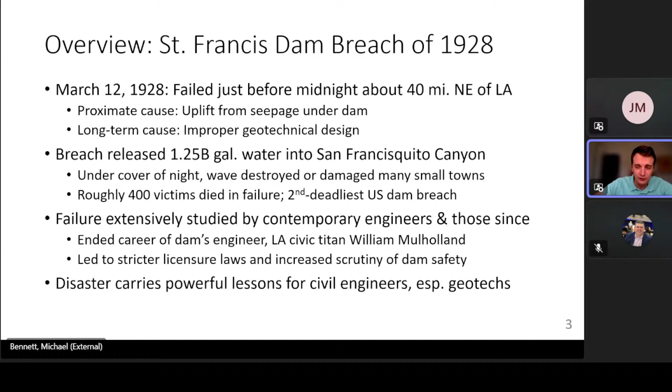So, Los Angeles in 1885 was just a small coastal town with a population of 11,000. San Francisco was the dominant metropolis in the Golden State. But that all began to change as the Gilded Age turned over to the Progressive era. In 20 years, by 1905, the city's population had swelled nearly 1,800% to more than 200,000 people. And therein lay a problem, because, as has been said elsewhere, nature has not provided California with the right amount of water in the right places at the right times.

And the solution to that was the Los Angeles Aqueduct. It is a 233-mile network of channels and siphons that conveys water from the Owens River in central California down to the City of Angels. It opened in 1913 and supplied Los Angeles with 300,000 acre-feet annually. And the project was brought to fruition by the city's water supply engineer, a political and technical wizard, or at least that was his reputation then, William Mulholland.

So William Mulholland was self-taught, as many engineers at the time were. He had worked for the city since the 1870s and had slowly climbed the ladder rung by rung from a ditch digger on sewer projects to chief of the Bureau of Waterworks and Supply. He was known to his men with some affection and a good deal of deference as the chief, and Mulholland tended to keep his own counsel. He didn't take kindly to others meddling, as he saw it, in his business.

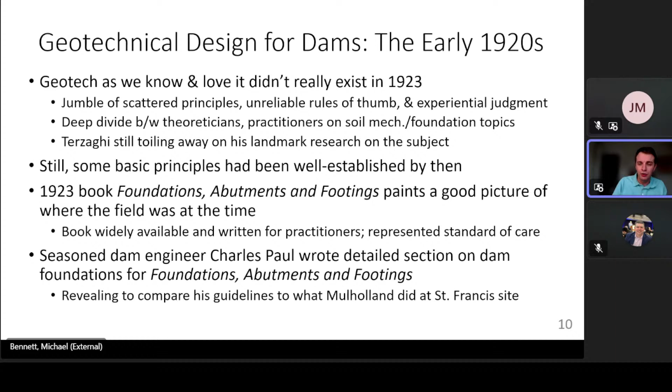Now, this book contained a detailed section on dam foundations, authored by seasoned dam engineer Charles Paul. And so I think it's quite revealing to compare the guidance Paul gave in his chapter of the book to what William Mulholland did at the St. Francis Dam site. Paul said that the main requirements to be considered for a dam foundation included bearing power, water tightness or control of seepage, and prevention or control of upward pressure uplift. And the failure to understand those conditions or appreciate their importance, he added gravely, has often resulted in disaster.

He noted that any masonry or concrete dam more than 200 feet tall needed to be founded on firm, hard rock without open seams, fissures, or faulting. The St. Francis Dam was ultimately going to be 205 feet tall, and the friable sandstone and fissile mica schist below it weren't really ideal for what Mulholland wanted to build there.

But Charles Paul recognized that you couldn't pick subsurface conditions at a site. Not every site was going to be ideally constituted for the dam you wanted to build there. And so he noted that a subsurface examination was ever more critical as the material strength went down. He also noted that special treatment would often be necessary so that the dam's foundation requirements were attained.

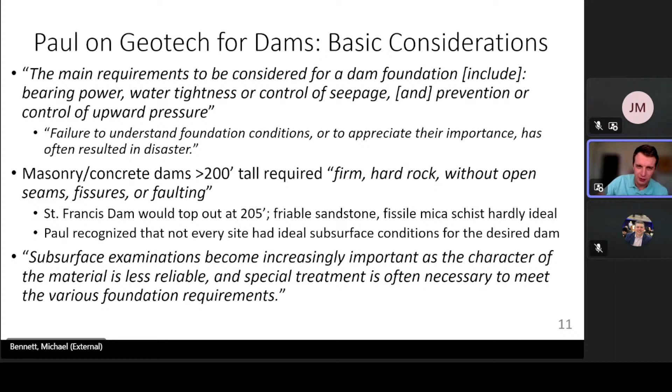Paul noted that it was desirable for dams to have a careful geological examination of foundation conditions, ideally one by an expert practical geologist. Per his account, it was important to assess the bedrock's probability of fissures and faulting, as well as former upheavals and disturbance, such as paleo landslides.

Paul recommended gathering soil samples at dam sites using wash borings. A common technique in 1923, put your wash hose in the ground after you drill a boring, and you wash samples to the surface. He added that those were most valuable if they were used together with test pits, which he wrote afforded the only opportunity to inspect material in place. That's still a huge advantage of them to this day.

As for bedrock cores, Paul preferred that at least 20 feet of bedrock be cored to assess its character. You had to verify that it was there. You had to observe its quality, whether there were faults, geologic faults, that is, whether there were lenses of soil present. He knew that keenly from his experience at Arrowrock Dam, where his rock cores had uncovered a soil layer beneath the rock layer.

And when Paul and his cohorts thought about it, they realized that there was a buried paleo ledge at the site. That could have severely compromised the dam's foundation had they not found out about it in time. By contrast, we have no evidence that Mulholland considered the site engineering geology for the St. Francis Dam. Now, he did briefly visit the location with Stanford geologist J.C. Branner before the design process began.

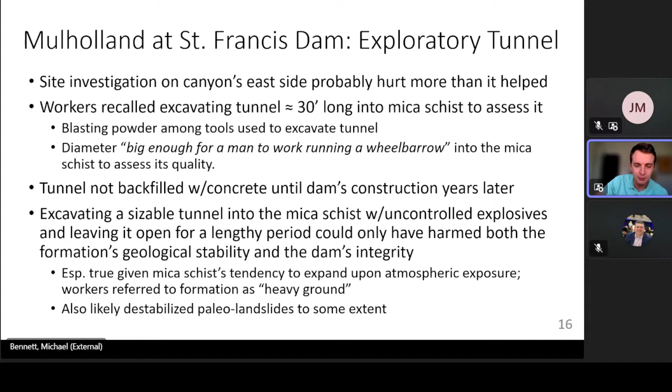Now, it almost goes without saying that excavating a sizable tunnel into the schist with uncontrolled explosives and then leaving it open for a lengthy period of time could only have harmed both the geological stability of the formation and the integrity of the future dam. That's especially true given that mica schist tends to expand upon atmospheric exposure, which is why the workers used to refer to the formation as, quote, heavy ground. It's also likely the case that those blasts and that excavation destabilized the paleo landslides in the mica schist to some degree.

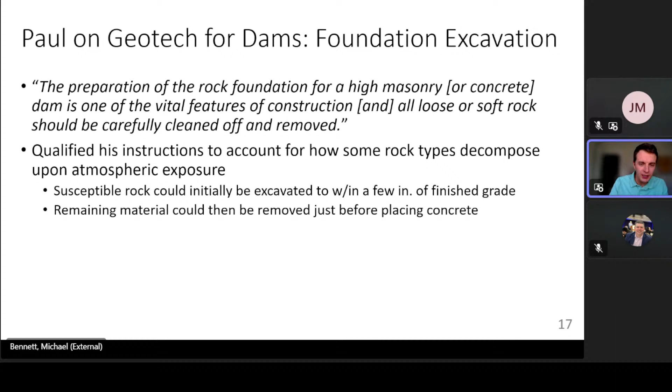As for foundation excavation, Paul noted that the preparation of the rock foundation for a high masonry or concrete dam required that all loose or soft rock be carefully cleaned off and removed. Paul did recognize that some types of rock decompose very quickly upon atmospheric exposure, so he qualified his instructions accordingly. He said that degradation-susceptible rock could initially be excavated to within a few inches of finished grade, and that the remaining material could then be removed just before concrete was placed.

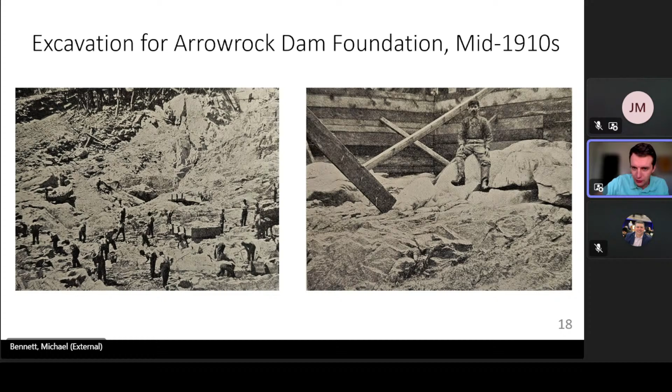Here's an example of what he was talking about at his Arrowrock Dam. On the left, you can see the large-scale excavations going on, men with pickaxes and shovels. On the right, you can see a worker looking over the finished product, which may not be the most even excavation, but is definitely on solid bedrock without any remaining chips or talus or anything like that.

Things were a little bit different when Mulholland began building the St. Francis Dam in 1924. We have fairly good construction records from the project, but the practices reflected in those records were suboptimal. As I've mentioned, an exploratory tunnel was dug into the mica schist, and the fact that that undercut damaged the formation so much, damaged the location of the future foundation so much, was very much contrary to Charles Paul's guidance. As you can see in this photo, talus and loose rock from the hillsides along the future abutments of the dam, this is the east abutment, wasn't properly cleared off before concrete was poured.

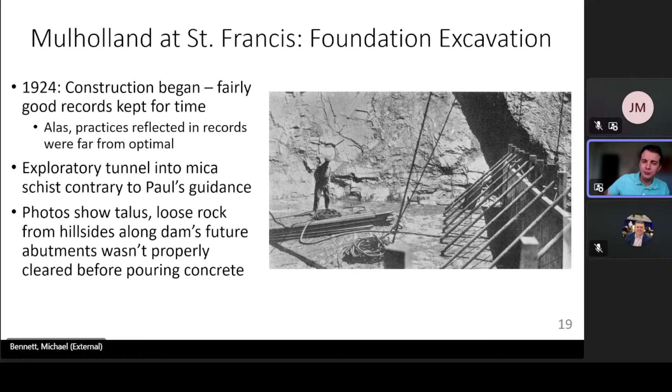As for the design of uplift for dams, that was fairly new in 1923, but the novelty was wearing off. As Charles Paul put it, the subject had been under lively discussion for a few years by then, but preventing uplift in dams usually wasn't too complicated. About a decade earlier, uplift had been thrust to the forefront of dam engineering discussions when an uplift-driven breach in north-central Pennsylvania killed 78 people. Only a timely phone call from a local who lived near that dam, the Austin Dam, spared hundreds more lives.

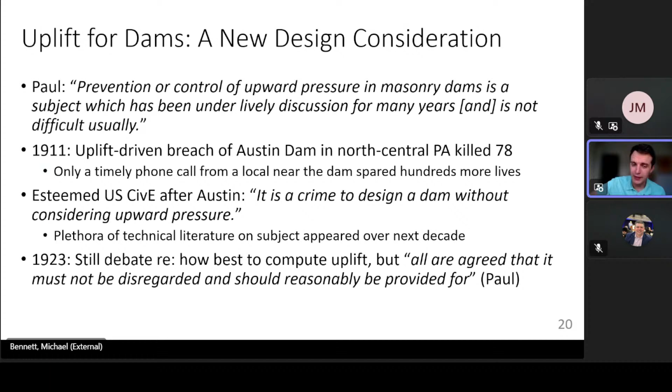And following the disaster, at least one esteemed American civil engineer declared that it was a crime to design a dam without considering upward pressure. Unfortunately, that wasn't Mulholland. A plethora of literature on the subject appeared in technical periodicals over the next decade, so that by 1923, engineers were still debating how to compute uplift, but everyone agreed that it needed to be considered and provided for.

As to how to provide for it, Charles Paul had a couple ideas. The first one we talked about was subsurface grouting, which he called standard practice in the construction of high masonry and concrete dams. Of course, subsurface grouting lengthens the flow path of water under such a structure. It decreases I, and by Darcy's law, Q. Paul knew that not only from Arrowrock Dam, where his crews had drilled 2 lines of holes 30 to 40 feet deep into bedrock beneath the structure and grouted one, more on the other one later, but also from the Lockington Dam, the one I showed in southwest Ohio, where his laborers had performed similar work, and they did their grouting there so well that no additional grouting was required for nearly a century.

Paul also suggested that grouting could be performed by drilling holes to the depth required and grouting in reinforcing bars to be carried up and tied into the masonry or concrete to tie the dam and the foundation together. Now, those of you who have designed micropiles recognize that Paul's description matches their fundamental design. It's commonly understood that micropiles originated in Italy after World War II, but Paul's description suggests that the geohistory book needs to be rewritten a little bit on that count.

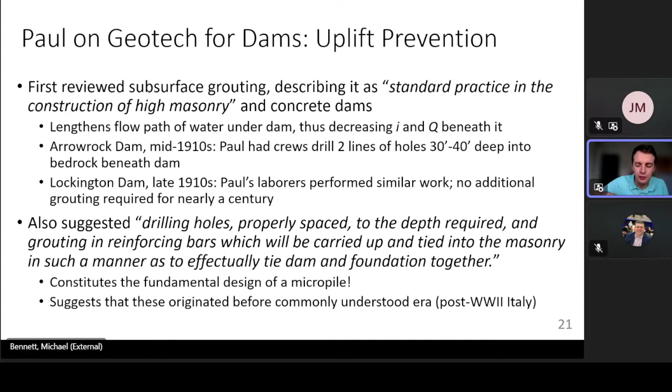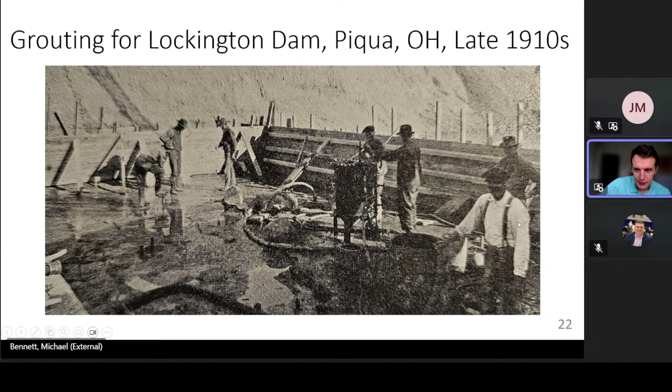Here's a photo of Paul's crews undertaking grouting at the Lockington Dam in the late 1910s. I'm not sure that their headwear would pass OSHA standards today, but you can see the mixing bucket and hoses. You can see the men hard at work, a few mugging for the camera. Compare that with the St. Francis Dam in just a minute.

Another method that Paul discussed was cutoff trenches, which he described as being excavated across the foundation along the upstream face of the dam. Per his guidance, they needed to be at least 3 or 4 feet deep and should be continued up the abutments and along the dam's full length. Structures on softer rock, he noted, should incorporate deep cutoffs or curtain walls of concrete at both their upstream and downstream faces. And he knew of what he spoke. Again, he had designed and constructed several cutoff trenches for dams along the Miami River in southwest Ohio.

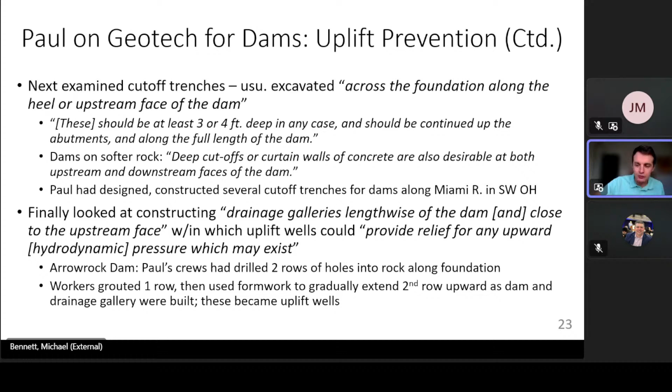And yet, contrast Paul's intricate, elaborate, and readily accessible guidance with the glaring lack of evidence that Mulholland et al. even considered a grouting program. Mica schist is notoriously vulnerable to seepage, and yet they did not even consider this. As for a cutoff trench, a visitor to the site, a civil engineer, reported early in 1925 that there was no indication of such trenching up the hillsides to provide vertical abutment faces. At the center of the dam, the upstream portion of the foundation was actually excavated 8 feet shallower than the rest of the structure's footprint. It didn't even extend to bedrock.

Now, Mulholland did include 10 uplift wells 2 inches in diameter beneath the center portion of the dam. But due to the length of the dam, that still left about 270 feet of structure on either side of those wells that was totally unprotected from uplift. Not coincidentally, right where the abutments were.

Now, when I look at Mulholland's wells, it brings to my mind the lifeboats on the Titanic on its maiden voyage, because those were pretty much added to the ship so that the management could check a box saying that a safety technique had been employed, without regard for whether it would do the job in case of an emergency. Similarly, it seems like Mulholland's wells call to mind the idea of checking a box for safety and not meeting the actual purpose of uplift wells.

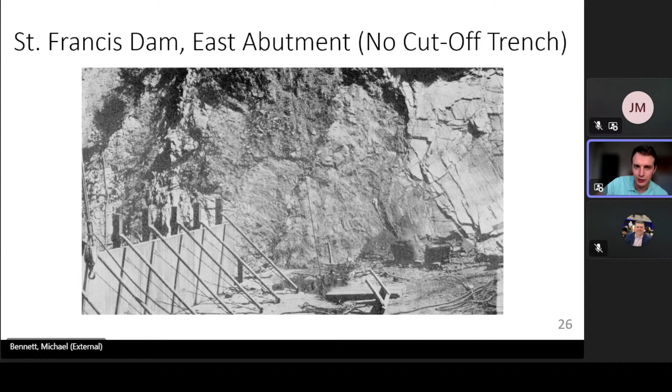Now, compare Charles Paul's photos of the Arrowrock Dam and the painstaking excavation for that structure with the fact that here you have no cutoff trench at the east abutment of the St. Francis Dam because Mulholland did not incorporate one. All of which is to say that clearly this structure did not meet the contemporary geotechnical standard of care when it was built from 1924 to 1926 under the supervision of William Mulholland.

And Mulholland made a couple of decisions that only compounded things as construction went on. He had, on previous jobs, engaged outside civil engineers as consultants to check him on his designs. This time, he did not. Now, Mulholland was legally exempt from an outside review of his designs. Under California law, municipal engineers were, and he was the municipal water engineer of the city of Los Angeles. But that doesn't mean it was prudent, even though it was legal.

He also increased the height of the dam 20 feet during construction and never proportionately widened the base of the structure. Now, that did give him a lot more storage in the St. Francis Reservoir, but it made the arch of the dam thinner and more vulnerable.

The structure itself was made of monolithic concrete, which was not uncommon for dams back then to lack reinforcement. I've seen no evidence that it was reinforced, but the unit weight of the concrete was just over 140 pounds per cubic foot. That's a little bit on the lighter side. And when you consider that they used hundreds of thousands of cubic yards of concrete, that missing weight adds up quickly.

The dam was finally finished in June of 1926 at a cost of $1.25 million in money back then. Today, it'd be more like $23 million. And the 205-foot structure was initially filled, the reservoir behind the structure was initially filled so that it was about 55 feet below the dam's crest.

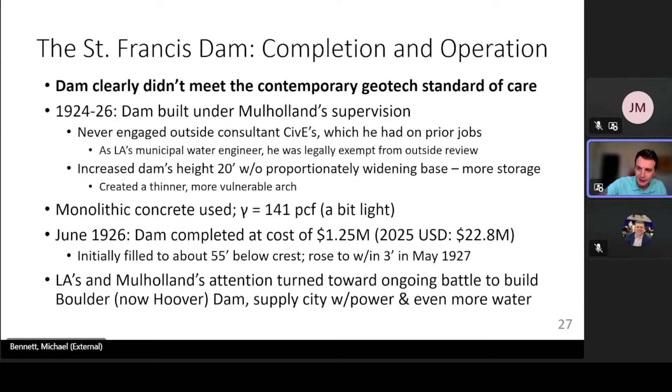Now, the cracks in and of themselves were not problematic, but they reflected the fact that Mulholland had made lapses in his design judgment. He hadn't accounted for them. And even if he wasn't concerned about leaks through these cracks, he should have been concerned about the fact that it resulted in the loss of water that the city then couldn't use to generate revenue.

But a much more worrisome problem emerged early in 1928. The rains that winter had been fairly heavy. Demand for water was down because the temperatures were cooler, and the reservoir slowly began rising. By the start of February, water was within 5 feet of the crest of the dam, and it stayed there for weeks and kept rising. By the start of March, it was within 3 feet of the crest of the dam, and it stayed there for over a week until the structure failed.

Now, obviously, the difference in head between the two sides of the dam was going up, which meant that per Darcy's law, flow under the dam, Q, was going to increase. And in accordance with that, locals noticed in the weeks before the breach that leaks at both abutments were getting both more numerous and more severe. Word of the problems spread slowly by word of mouth and worried neighbors, until finally word got to the dam's keeper, Tony Harnischfeger, who reported to William Mulholland.

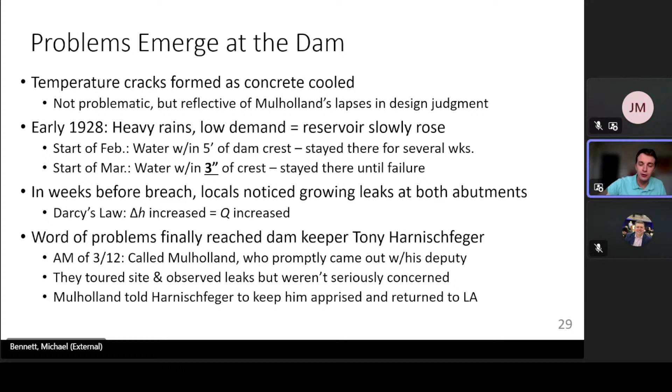On the morning of March the 12th, the day the dam failed, he called Mulholland, who promptly came out to the site with his deputy. Give him credit for that. Mulholland, the deputy, Harnischfeger, they toured the site. They observed the leaks that the dam keeper had noted, but the engineers weren't seriously concerned by that. So Mulholland told Harnischfeger to keep him updated, and he went back to Los Angeles.

You can see from this water stage record, at around 8 o'clock in the evening of March the 12th, the water level readings at the dam, as measured at a gauge on the center of the dam at its crest, began slowly falling. Now, there was an outflow channel to take excess water away from the dam, but eyewitnesses did not recall leaks growing more severe then, which would have filled the channel. It was around the time the sun went down, but you would think they would have at least heard that roar building up in the overflow channel.

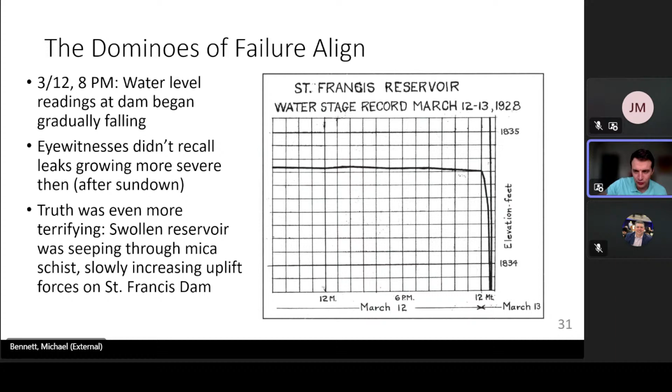They did not. And that's because the truth of what was happening was even more frightening than that. The reservoir was so swollen that it was seeping more and more through the mica schist and slowly increasing the uplift forces on the dam. So this doesn't reflect a falling reservoir. It reflects a rising dam. And the problem slowly began to get worse. As you can see, more and more water began leaking.

And by around 5 minutes to midnight, a large piece of the east abutment of the dam, labeled Block 35 in investigations by forensic experts, couldn't take the combination of uplift and high water any longer, and it gave way. And that created a nozzle through which water began jetting out from the reservoir. It's interesting to note, although no one at the time did, that Block 35 is right near where Mulholland's men dug that exploratory tunnel that they didn't grout for several years into the mica schist.

After the fact, Tony Harnischfeger's body, the dam keeper, was found upstream of his home below the dam with a lantern in his hand. And that suggests that he had heard something in the final minutes of his life and went to investigate. But I'm getting ahead of myself.

As Block 35 gave way, water percolating beneath the dam was also reactivating the old paleo landslide. And that was only exacerbated when Block 35 finally failed. When it failed, other dominoes began falling. Other blocks began failing in sequence. That removed support from the old slide. The factor of safety fell to 1, and the old slide was reactivated.

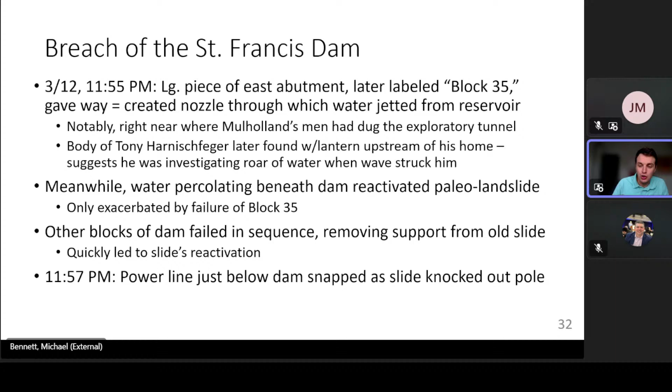It so happens that there was a power line running through that area, and at 11:57, employees at the electric company noticed that the power line snapped. Power went out. And that's because the slide had knocked out the pole. And because of that electric company's observation, we have data as to exactly when the St. Francis Dam failed. Now, a picture's worth 1,000 words.

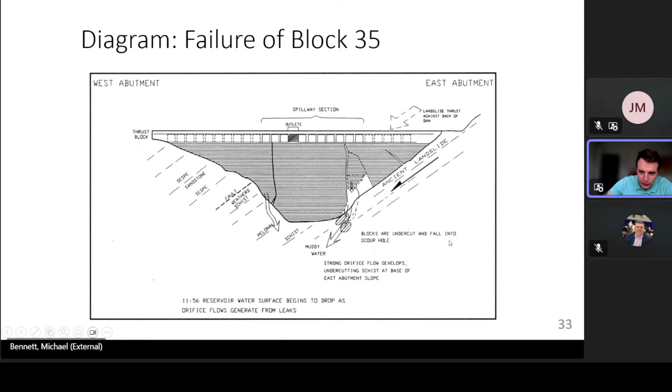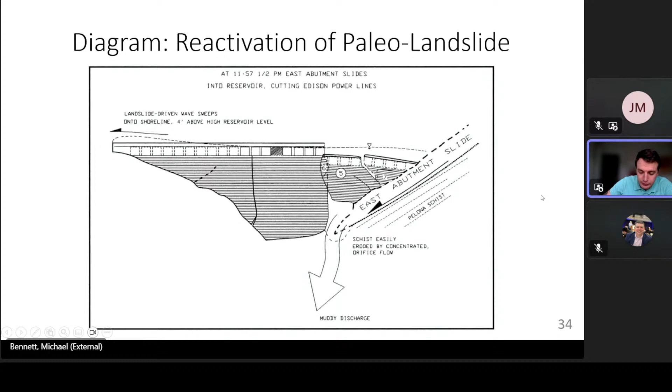Here you can see Block 35 in this area when it blew out, and how that nozzle of water, as I've said, caused a progression of failure of other blocks and also worsened the ancient landslide, until about a minute later, the ancient landslide came a-tumbling down. Other blocks were jolted out of place, and at this point, everything broke loose.

After the slide and the failure of the east abutment of the dam, water poured through the structure's east side, leaving a trail of about 500,000 cubic yards of mica schist scattered like glitter through the San Francisquito Canyon. Surviving evidence suggests that of the 205 feet of water depth from the reservoir, the uppermost 40 feet or so poured out through the east side breach.

The waters were so powerful as they exited that they wrenched the center of the dam toward the east abutment. We know that because the water level gauge pipe mounted atop the center of the crest was bent toward the east abutment after the fact. And at that point, that wrenching action separated the dam from its west abutment, and that created a new breach through which water rapidly found its way as well.

And this abutment also failed. Now, damage from this secondary breach was severe, but more features survived on the west side of the dam. For instance, a hairpin curve in the road right near the level of the full reservoir. And that reflects that the secondary breach happened later.

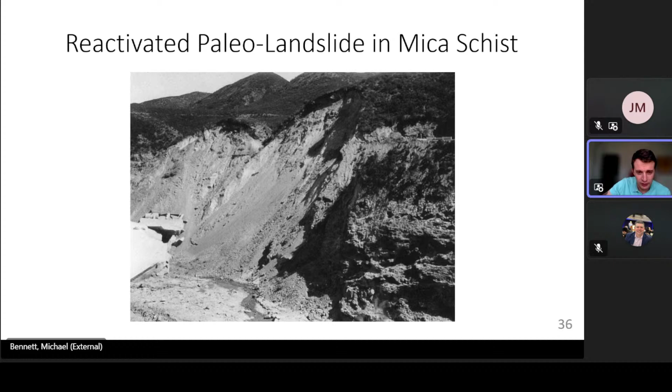Now, the center came within a hair's breadth of failing during this time, but it stood. And the next morning, as the sun rose on the scene of the disaster, it loomed like a tombstone over the scene in a fitting, macabre way. Here's what that paleo landslide looked like in the mica schist after the dam had failed.

We aren't certain. Fortunately, several telephone operators worked their switchboards, called houses up and down the valley in the middle of the night, and prevented an even worse catastrophe. But for William Mulholland, his career was effectively over. He had given Los Angeles 50 years of service, but it now ended ignominiously.

And people wanted answers. The governor of California convened a panel of experts to get to the heart of what had happened, and Los Angeles County convened a coroner's inquest at around the same time. But this wasn't just a noble desire to serve the citizenry. There were political considerations at play here, because by 1928, the Boulder Dam was slowly winding its way through Congress, and it promised to add rocket fuel to the growth of the City of Angels.

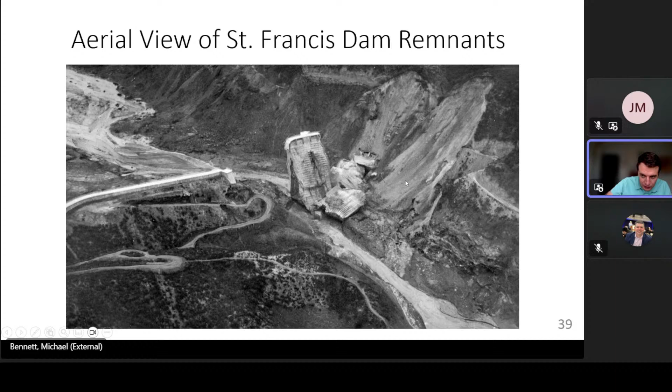And here's that hairpin curve you can see in the road near the dam that indicates that the west abutment failed later than the east one did, where the roads washed out. And here's an even more dramatic view that shows the mica schist scattered through the San Francisquito Canyon like a trail of glitter.

Now, the governor's commission on the dam failure was packed with heavy hitters. It was studded with civil engineering and geology standouts of the day. And these men, they were all men, got to work very quickly. They visited the site, they discussed their findings, and 2 weeks after the dam had failed, they delivered their report to the governor's desk. They stated that, in their opinion, the first thing to give way at the dam had been the sandstone at the west abutment because it had readily dissolved.

But that explanation leaves a few things to be desired. It doesn't account for the landslide at the east abutment of the dam. It doesn't explain why the hairpin curve at the west abutment of the dam was preserved, as I've noted, and as you've seen. And it also doesn't make sense in that case why the discharge channel for the dam hadn't exhibited unusually high flows if water was leaking out.

Plus, if the material at the west abutment had been as soluble as the panel had claimed, the abutment should have been exhibiting serious leaks throughout the lifespan of the dam, and yet there weren't any before March of 1928. Even the panel admitted that they weren't entirely sure about the precise sequence of events in the failure. As to the failure's cause, though, they were more secure. They blamed poor foundation design, i.e.

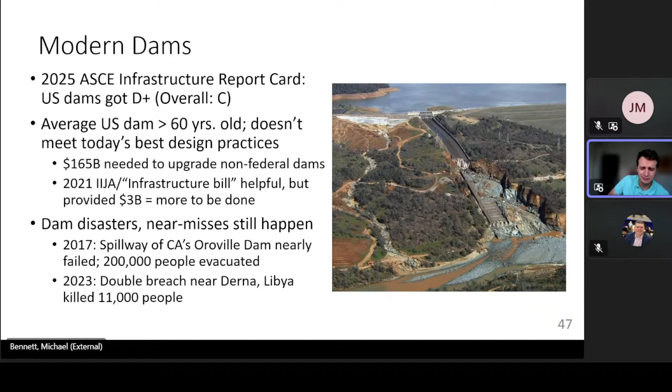So, what am I hoping everyone takes away from this? If you don't remember anything else, just really try to take some things away from these last couple slides. The story of Mulholland and the St. Francis Dam bears some powerful lessons. We need to balance confidence in our technical expertise and professional judgment with the recognition that we need to work together as a team to prevent mistakes, and the humility that we all make mistakes. To err is human. We have that limitation.

And it's really true in geotech that we need that humility because of the high inherent variability of the materials with which we work. We have to meet the contemporary standard of care because it memorializes people who died either due to shortcomings in previous versions of the standard or flagrant violations of the standard. And as the standard improves, it's on us to keep up with it. We have to keep improving our design and construction practices. And while our work is very technical, its consequences in the end are human. The impacts of our successes might only be surpassed by those of our failures. As forensic engineer Roberto Leon has put it, a PE truly is a license to kill.

As for the St. Francis Dam, it's sad to say that William Mulholland's handiwork didn't meet the standard of care. His team didn't conduct a detailed geologic study or subsurface investigation of the site. In fact, their tunnel into the mica schist at the east abutment likely contributed to the dam's failure. Mulholland did not incorporate adequate measures for seepage and uplift prevention into his dam's foundation, just a smattering of pitiful wells in the center of the structure. And he didn't have his crews properly excavate the foundations of the dam. I showed you the pictures of all the loose material and talus along where the abutments would be. And that was compounded by the fact that he operated free from outside oversight and that he raised the dam 20 feet during construction.

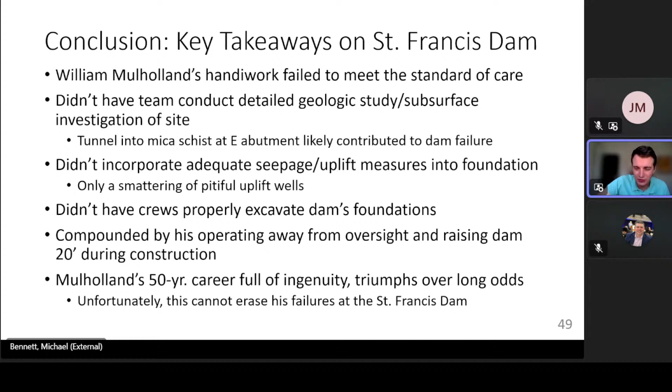Now, Mulholland's career spanned 50 years, and it was full of ingenuity and overcoming adversity and triumphing against long odds. But unfortunately, none of that erases his failures at the St. Francis Dam. If you look over the site today, with this story in mind, there is no pleasure to be had, certainly not on my part, in attributing the breach to William Mulholland. But that's where the evidence unmistakably points. As he once told onlookers when he opened the Los Angeles aqueduct, there it is. Take it.

I'd like to acknowledge a couple groups of people. Geo-Institute, Virginia Tech, Sebastian Lobo Guerrero, my technical editor, Thomas Kennedy, who wrote an earlier version of this entry with me, and D.C. Jackson of Lafayette College, who literally wrote the book on the St. Francis Dam breach. And I dedicate this presentation in closing to the memory of the victims of the breach.